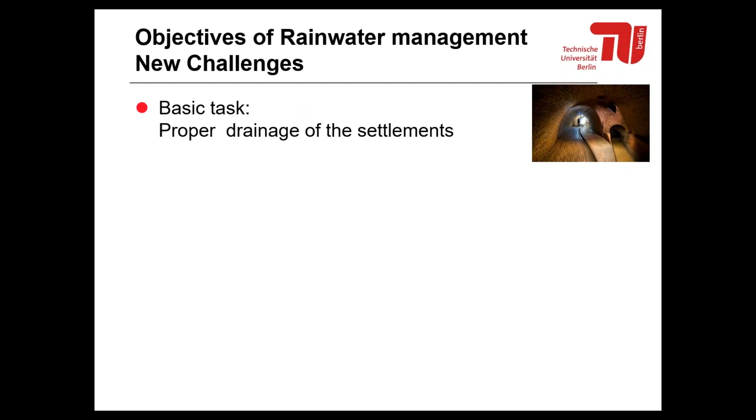The basic tasks for rain or stormwater management and the new challenges are given here. The basic is proper drainage of the settlement, realizing a rain event which appears every 2 years. We have huge experience with that. We have sewers built starting in the middle of the 19th century, out of bricks, as you can see here. But we have new tasks regarding water quality, since pollution on the roads has increased, so we also have to treat the stormwater properly.

Due to climate change, we have additional heavy rainfalls and flash floods. You see here, it's not a traffic jam, it's a heavy rainfall on my way home with my bicycle, by the way, but I couldn't pass these cars.

Also, we have to care for the climate of the city. The heat is much stronger than before, it's increasing. We had an awful April, and also the years 2018 and 19 were very hot. So heat island effects, and also drought, so we need to irrigate our parks and cover the growing cities. The sealing we have already done with asphalt pavements, and also we have a loss of biotopes.

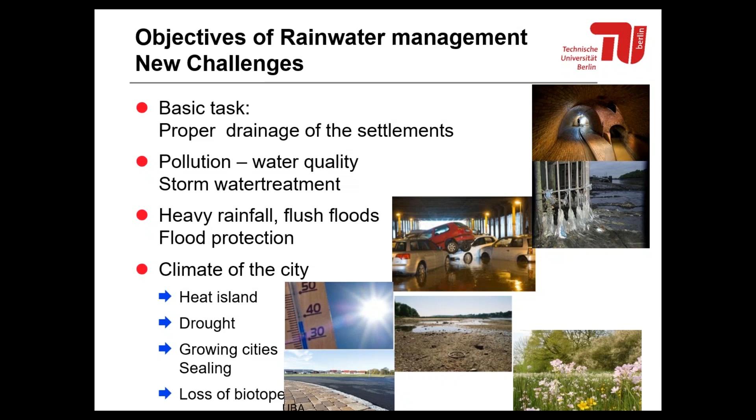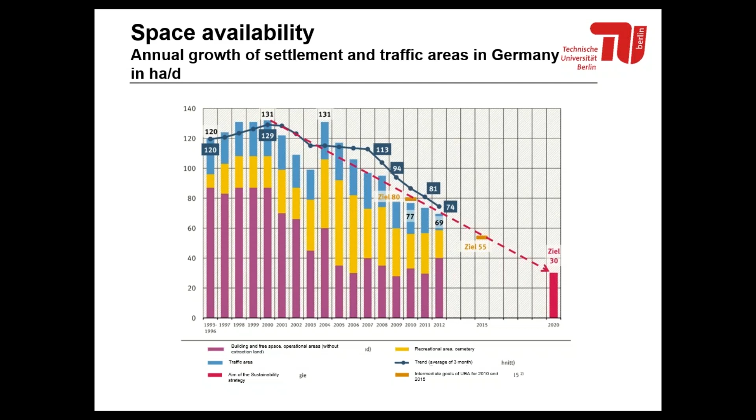The other issue is that people like to gather around, to come close to each other, not just 1.5 meters apart - they like to live in cities. And that's why we cover more and more of the surface. Actually, in Germany we have around 70 hectares of newly covered surface per day. 70 hectares means 15 square meters per second - 15 square meters is just about a student room. So we have to reduce this.

The first part is conventional rainfall management. As I mentioned, we have to prevent flooding of the street. We have the drainage here, the water from the roofs. The conventional system handles maybe a 15-minute rain event which appears every 2 years.

Then we have rare heavy rains, which, as I mentioned, will appear quite more often. So we also need to use the open spaces and the traffic spaces, the roads, for transportation - for transportation of the water, not for traffic. You can see here, you have to calculate the pathways, the flood pathways for the water. And for the biggest event, to protect us from it, we need property protection - I will also explain that, the safety of houses, so there's no flooding of the houses.

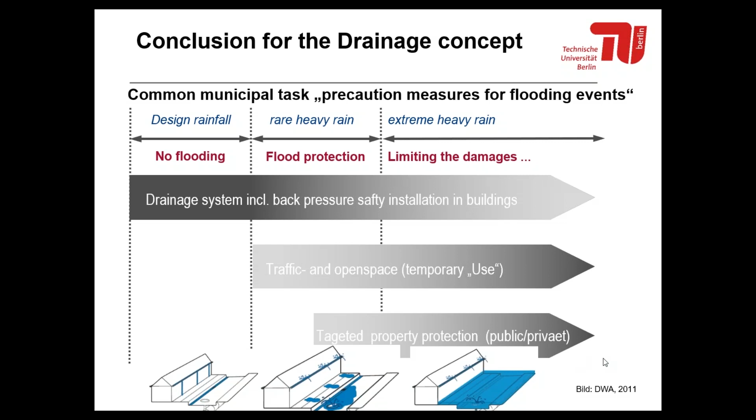Yes, the base for our calculation is the water balance. We have to look and be oriented to the natural water balance. On the left-hand side, there's a small example: maybe 40% transpiration, 10% runoff, and around 50% infiltration into the soil. But if we create a city, we have a heavy impact on the water balance.

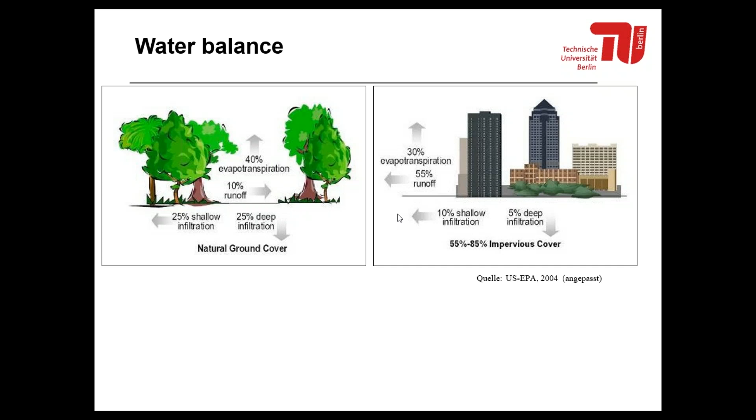So the evaporation is reduced, in this case down to 30%. The runoff, we have to increase by our drainage systems up to 55%, and so the infiltration is much too low. So we have to check this, and in all our plannings we have to keep back and look at the objective that we have to compare the natural water balance of a similar area to our planned real estate or district or site level.

And then we have to adjust the water balance by the options we have, the methods and the measures. We have to implement more evaporation or more infiltration. Our recommendation is that you should not change the single components of the water balance more than 10%. And because evapotranspiration is really difficult to implement - not all architects like green roofs - we can allow maybe 20% here.

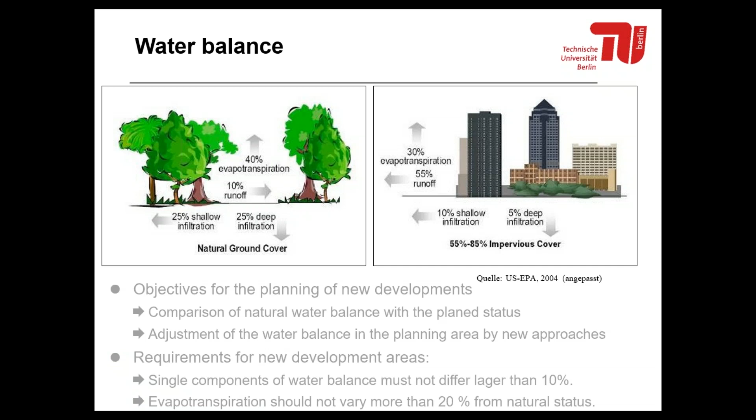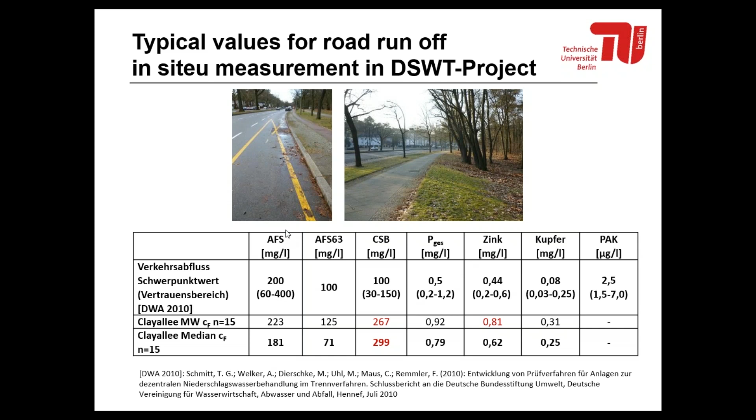So the German concept is to look at the fine suspended solids, which are smaller than 63 micrometers, and then we look at the open space - what is the use for the open space? Maybe just a roof on a single house, then we would not expect much, so then we're maybe lower than 280, and that's tolerable. But if we have higher concentrations of suspended solids on our surface, then we have to implement treatment systems for the rainwater.

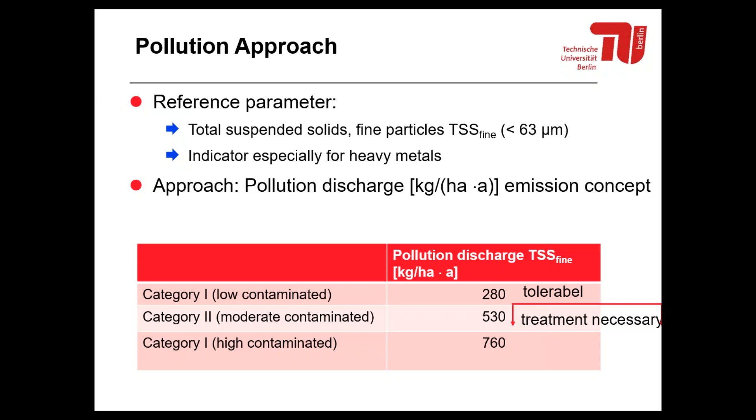So the conventional treatment we know very well - I mentioned already our sewers, so we have combined sewers. One question of mine would be: how many of you have combined sewers? Maybe which fraction in your city? In Berlin, we have around 30% of combined sewer still in operation, but we also have 100 combined sewer overflows.

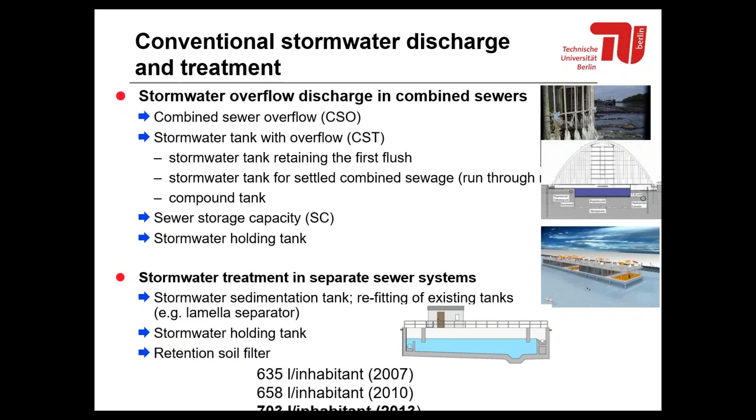We can see here also stormwater holding tanks, and the high end of stormwater treatment. In Germany we installed up to 700 liters per inhabitant of storage volume. That's the average, and it's still increasing - you can see from 635 to 703.

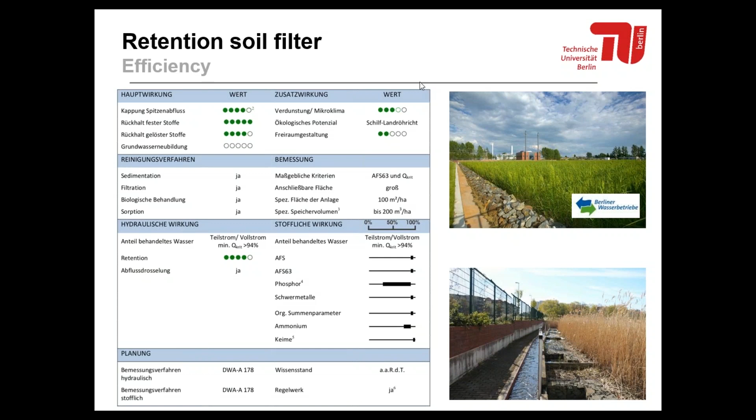So the high end of treatment in a separate system is a retention soil filter. You can handle the peaks of the flow, eliminate all the suspended solids, eliminate phosphorus and also COD. The space demand is just 100 square meters per hectare of area to be dewatered.

I will briefly explain all the systems, I'll try to hurry up. On one hand, we can decouple space which was sealed by pavements or whatever. We can implement other traffic surfaces, porous asphalt for example. We can use rainwater harvesting at the houses, and improve infiltration. This can be done decentral or centralized.

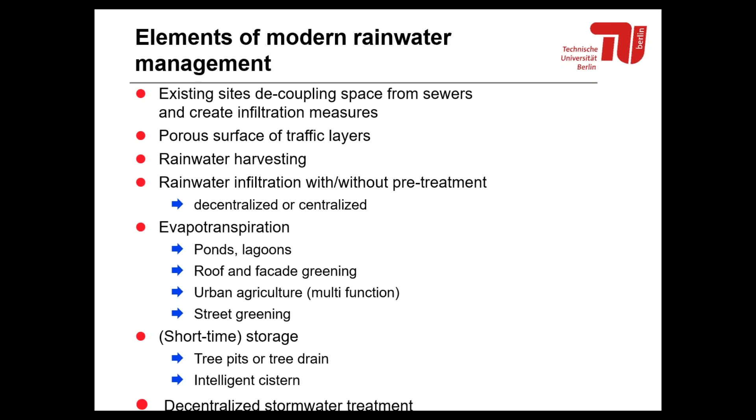Then we can build all these ponds, roofs. Urban agriculture can also contribute a certain value for the water balance. I mentioned street greening - what we developed is tree pits. We go into this, and an intelligent cistern to keep good elimination of microplastic and dust on the roads. We suggest decentralized stormwater treatment, although there's a high maintenance cost affordable for that.

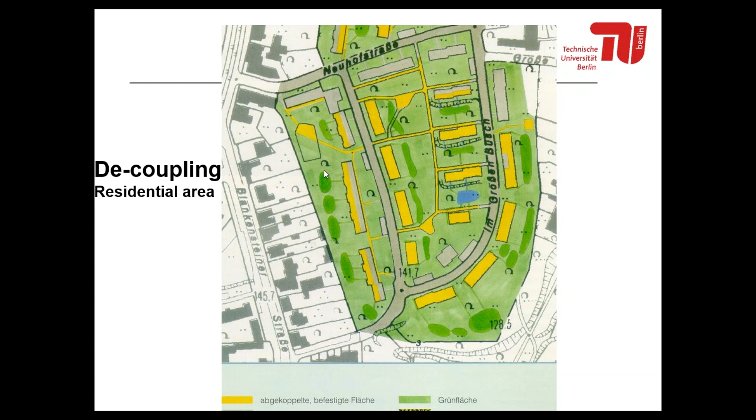Decoupling - this is an example from the city of Essen. You can see these are the houses, and all the yellow parts are decoupled from the drainage. So there's new capacity in the sewer, and they have built swales here, multifunctional swales.

You can see here, this is a dry season, but this is a swale for the water. But you can also dry your laundry and take a sun bath.

Unsealed traffic layers, this is also developed from our friends in the Netherlands. The open porous asphalt is quite efficient for drainage, but all the fine particles will clog these pores, so we have to do more very efficient road cleaning.

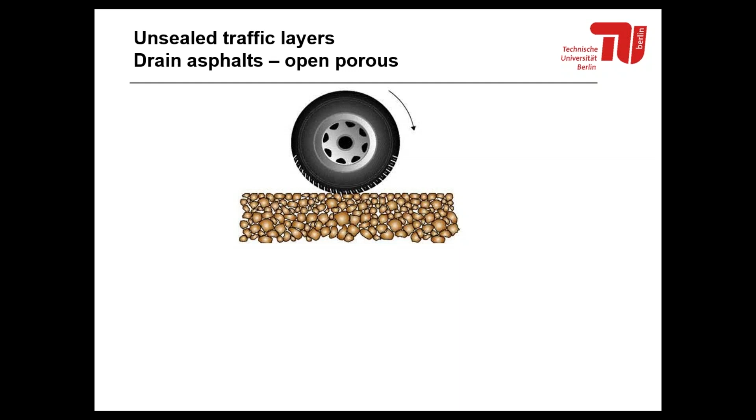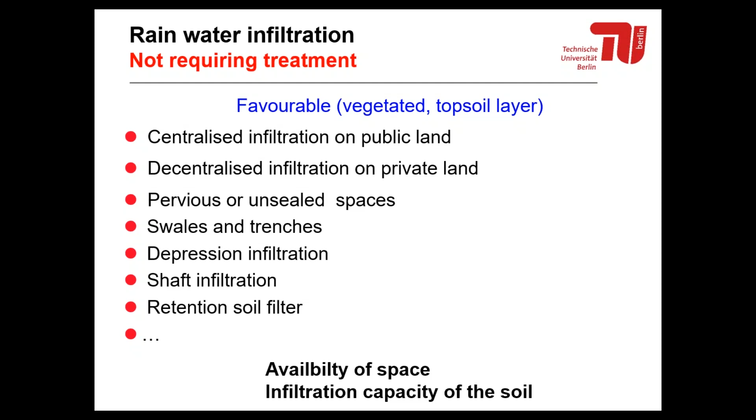There's an overview here given for all the possibilities for infiltration. You can look at this overview later. I will show you the options in detail, but we always need a certain amount of free surface, and the soil has to offer a good infiltration capacity so that we can infiltrate the rainwater.

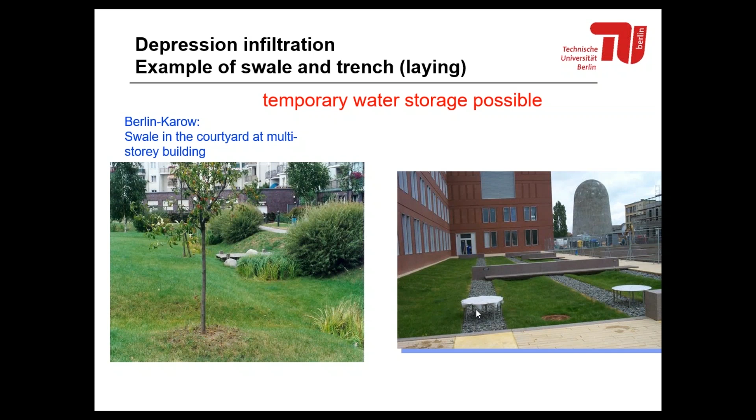If you have less space, here is an option also, two options from Berlin. You can implement a swale, we have seen the swale already - this is for several houses and also for the pavements and sidewalks. Additionally, there are ditches with gravel to increase the infiltration capacity.

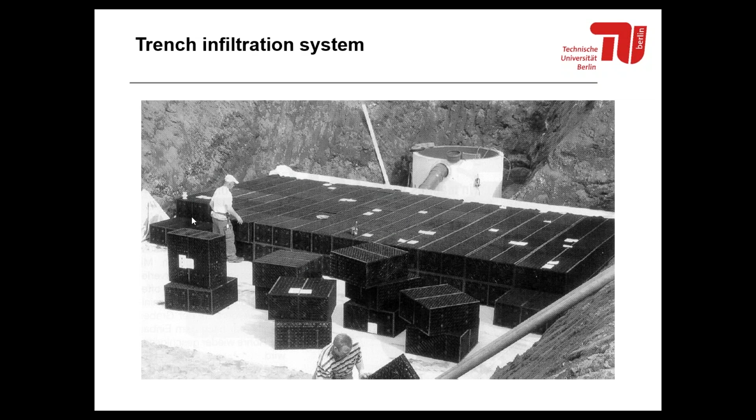If you have less space or less infiltration capacity, you can build subsurface storage, maybe with plastics. It's given here - subsurface storage with plastic, and from here you can filter water out into the ground. So this is trench infiltration.

A variant of this trench infiltration, developed with the consultant Sieker, which we collaborate closely together with, is the deep bed trench. It can be implemented just in the road. The water can be treated there, can be stored, also stored below the ground, and there's a low space demand. Additionally, it calms down the traffic, maybe in residential areas.

Also green roofs. Green roofs improve evaporation, but they also buffer the peak of the effluent from a roof, and it's additional habitat for organisms. We also have a contribution to the microclimate on the roof, a better thermal isolation, but we have to keep in mind the weight of the additional green roof, so maybe it's not easy to implement directly. We can differentiate between intensive green roofs with trees and so on, very nice, or extensive green roofs.

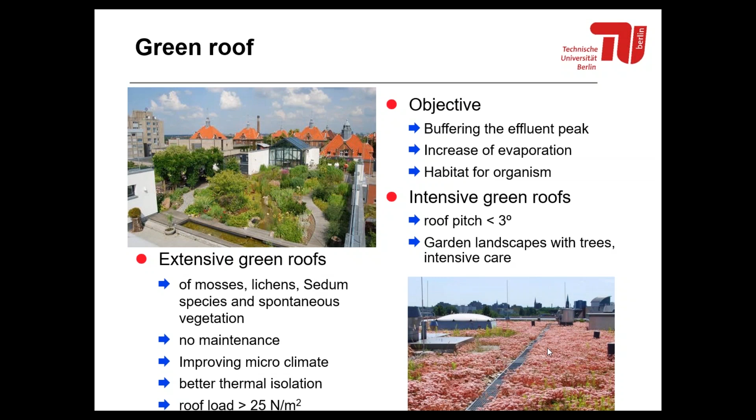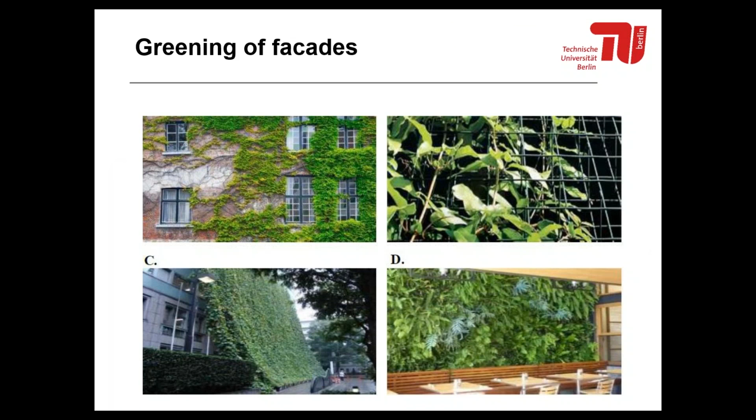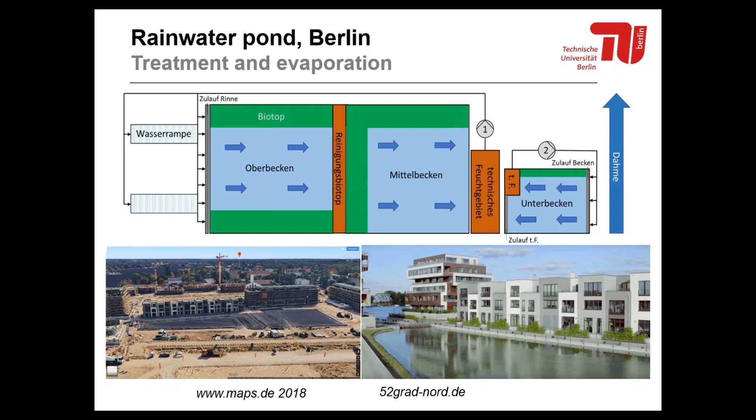The newest thing we also developed with Sieker is the intelligent cistern. A conventional system is quite often used worldwide - in Germany we have just 1.5 million, each year 80,000 new ones. It's just a contribution to saving drinking water, saving money. But additionally, it offers new space in the sewer system when we don't have this rainwater in the sewer system.

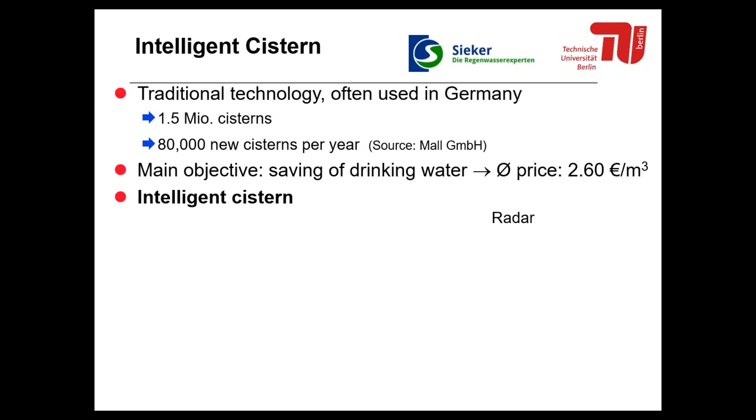So the idea of the intelligent cistern is to predict the rainfall. Here you can see the weather forecast, and we empty the system just by the information from the radar, from the rainfall prediction, and then we have the capacity to store water directly at our house.

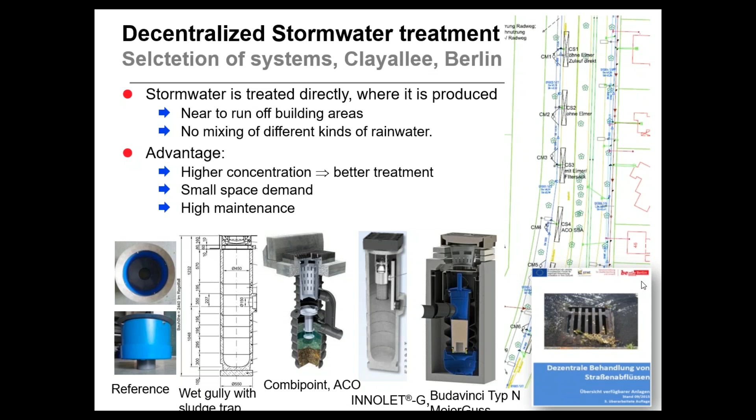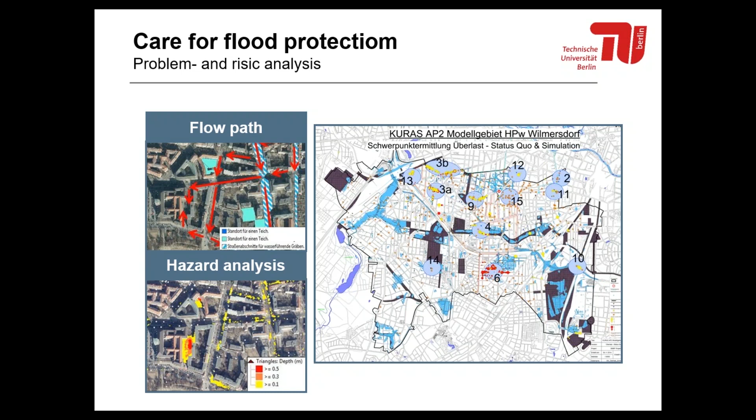At least I also want to care for flood protection. Flood protection is needed, so we need to calculate the flow paths at the surface. We need to detect depressions where we can store water, and we need to make a hazard analysis of where important buildings or points are where a lot of damage can appear. Then you can make a map and a strategy for that.

The first idea, for example, is using a children's playground during a heavy rain event. We have this space, and I guess children wouldn't play outside during the rain event, so we can drain the water to this place. You also have to think about draining the water afterwards, because after the rain, maybe the children want to go out, like they want to go out after Corona.

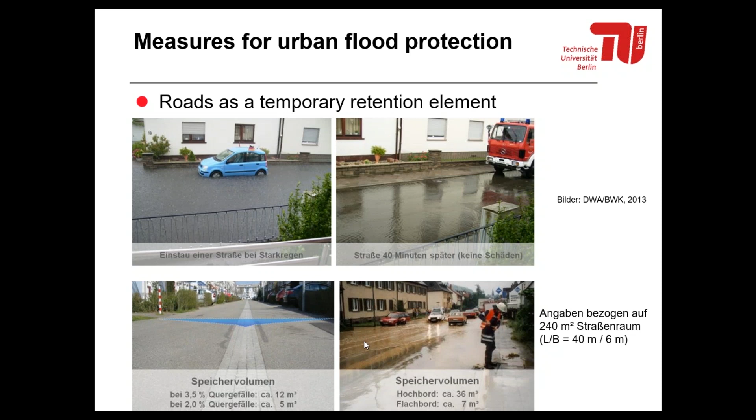Also using the space on the road - if you have a special grade here, you can realize a certain retention volume on your road. You can see here this is during a rain event, and just after the rain, nothing happens to the road.

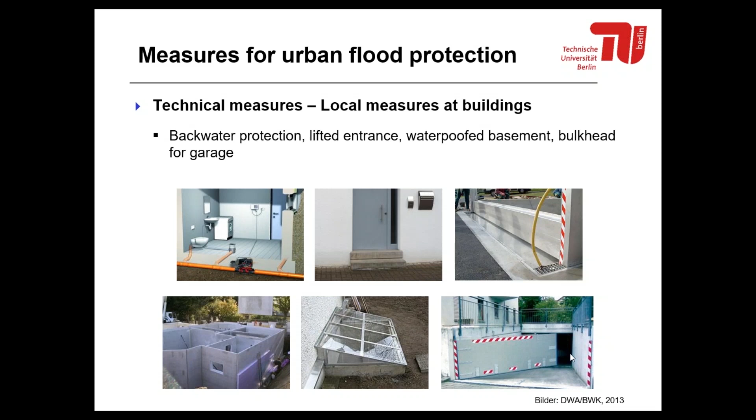Coming to the end, challenges for the implementation of a water-sensitive city—this is also one part of my questions maybe at the end. I think first the stakeholders have to get the knowledge of all the elements and the need. I'm sure the consultants and planners have the ability to calculate with 2D, 3D models and so on. So the region planning was only focused on the drainage, but we need to build up the competences in the different authorities. I'm convinced of that.

In the cities we need strict coordination with all the planning departments, like traffic planning, spatial planning, city planning, and of course water planning, drainage planning. We also need regulations—if the state does not make them, we can make regulations for our own city or settlement, rules for flood protection and creating open spaces. In Germany we have a rainwater fee, for example: you pay for each sealed surface, maybe €1.90 per square meter, and if you decouple it, you can use this money for the decoupling or whatever. We also have to think about integrated planning, decreasing concentration of housing, and looking at open spaces for flood protection and infiltration.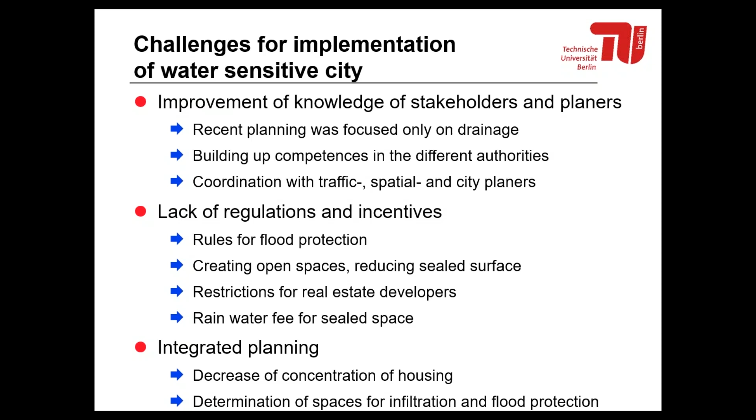In the end, I want to show you the vision we had some years ago together with Imperial College London, which is often mentioned in the Corona crisis now. We had a project, the Blue-Green Dream, and now a project called the Blue-Green Street. My vision is also to make the Blue-Green City—a water-sensitive city. That's the focus we have to work on.

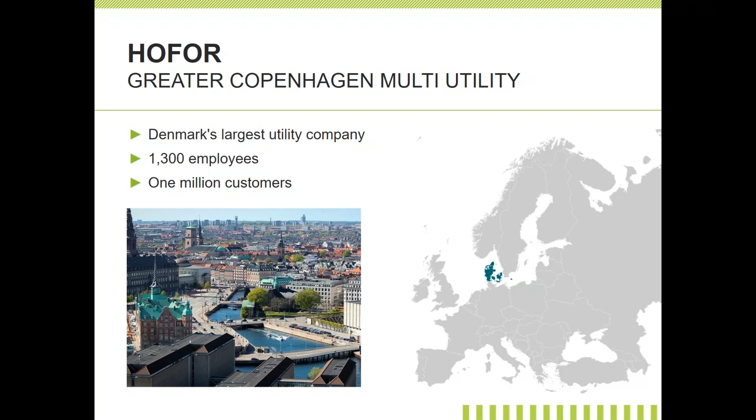Copenhagen prepared its first sewer plan in 1976, and it was renewed every 4 years since then. This led to a lot of construction of retention tanks. We have a combined sewer system, and Copenhagen municipality is almost 100% combined sewer. The surrounding municipalities, which are also part of HOFOR, have much more separate systems, but Copenhagen itself has combined systems. So retention tanks were necessary at that time, and that led to closing many of the overflows into the harbor. Further, 3 advanced wastewater treatment plants were constructed.

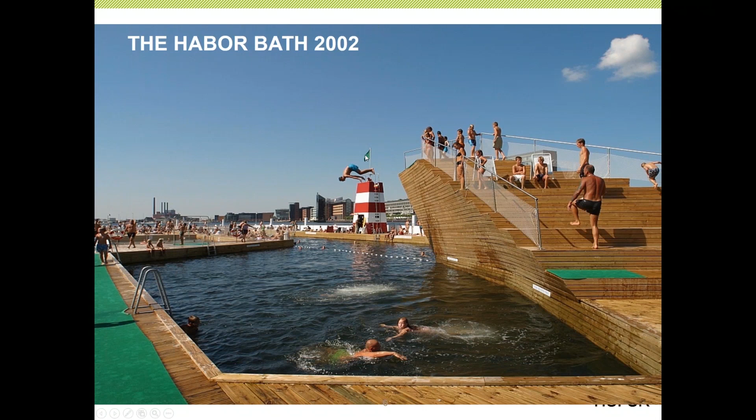2nd July 2011 was a real game changer. We had this extreme flood event, causing a lot of damage all over the city, a combined damage of above 1 billion euro. Since there were so many people affected by this flooding, there was very broad political support that something needs to be done, also at national level.

A cloudburst management plan was then prepared for Copenhagen, subdividing the city into 7 hydraulic catchments, and at the same time describing these catchments for their urban features, because it was agreed that a lot of the rainwater will have to be handled on the surface and not in pipes.

At the same time, the government prepared a new regulation stating that all handling of rainwater should be financed by the water company, so that this is financed on the water bill. So we have a budget now of 1.4 billion euro and 20 years to implement this. So financing is not being discussed, because the money is there and it's put on the water bill.

The second important thing was the level of capacity in this extreme rain handling system. What size of rain should we design for? There will always be a bigger rain coming. We made a business case comparing the investment to the potential loss, and based on that comparison, we agreed that we should end up on a design level of 100-year rain in 100 years' time. There's a climate factor to that. So statistically, 100-year rain in 100 years' time.

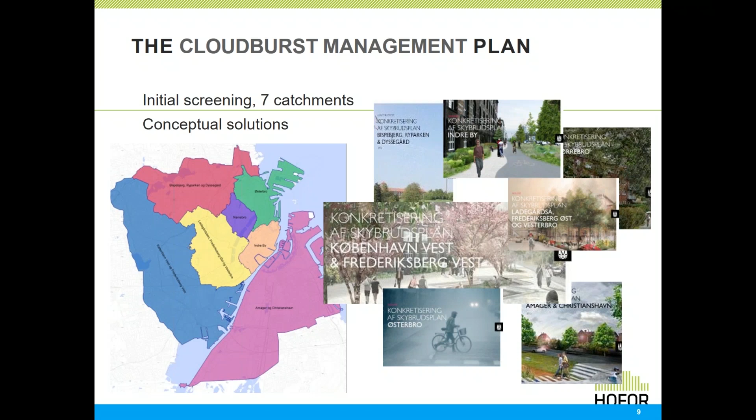It's important that your solution is hydraulically coherent. You can put up a fancy feature on a square and make storage there, or you can make some green roads, but what role do they play in controlling the flooding? You have to prepare a coherent plan, and here it is for a subcatchment. The plan consists of streets transporting water, of retention places, of green streets with green plants and features, which we've just seen in the previous presentations. All this drains down to a major pipe system or tunnel system, taking the water into the sea. The comprehensive plan is key to making sure that every intervention you make plays a role in the overall picture in achieving a service level for the whole city.

When you are working on the surface, you have to work closely with the municipality because they have urban renewal plans, either for a whole area. This includes some low-income areas which need uplifting. There is a churchyard where one-third is going to become a public park, and so on. This is the churchyard, the development plan for it.

There are streets that have to be upgraded. There are inner yards where you could keep water back, and a program for doing this. And of course, parks that you can rebuild, making them more fantastic landscape-wise, while at the same time retaining water.

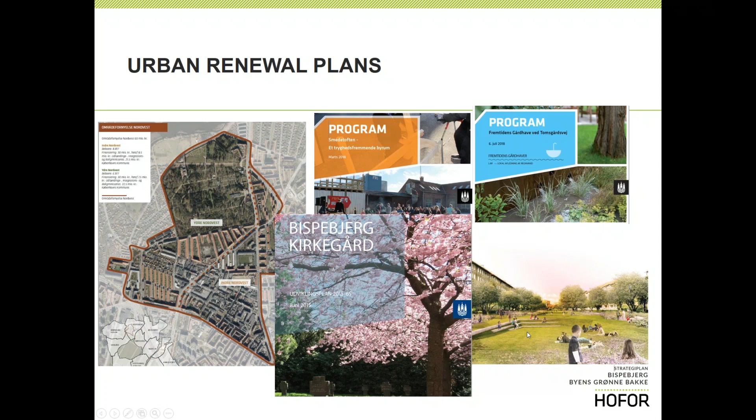So all in all, cooperation between the water company and the municipality means that you divide the work between you. We can manage all the hydraulics. We can also do a lot of the design, and oversee the construction. The municipality issues discharge permits and develops urban space with landscape architects. Some of the areas are conservation areas with old buildings and old trees that need to be protected. And of course, there's the whole street upgrading, street renovation, etc.

In between HOFOR and the municipality, by the way, HOFOR is 100% owned by the municipality.

So it's a municipal-owned independent company. In between, there are all the private roads and private streets and the building associations. They were also flooded on 2nd July 2011, so they are ready to participate also.

By the way, a lot of the hydraulics, HOFOR are financing, because it's cheaper to invest in them retaining water compared to building larger pipes or tunnels. That's all the time the argument: we can spend money on these green solutions as long as it is saving us investment in pipes and tunnels.

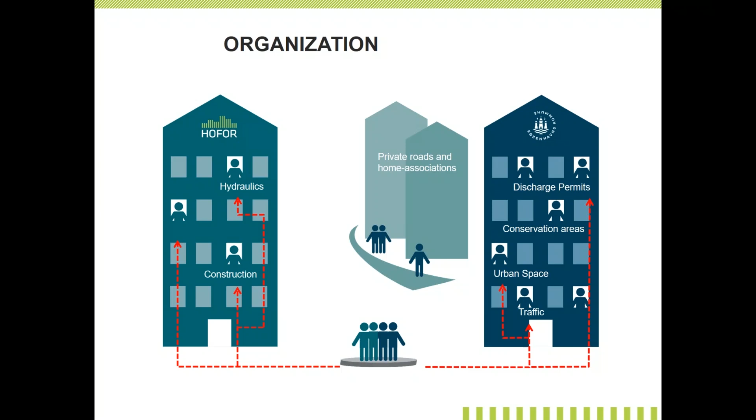And we even have challenge during daily rain. Daily rain is less than a 10-year rain in Denmark. The combined sewer should be able to accommodate a 10-year rain. So you can see our combined sewer doesn't have enough capacity, and therefore we have to start disconnecting rain from the sewer.

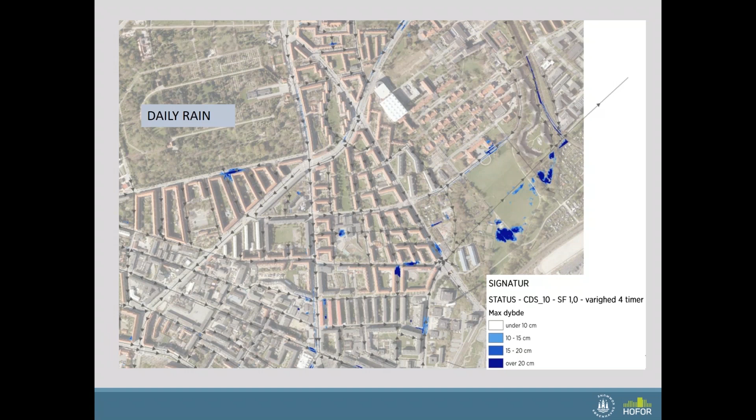There are green features around the trees that we've just heard about. This has been built now and are functioning very well along this street. And then you have all these green streets with the green features holding back water and disconnecting and treating rainwater. All this water, the surplus water that cannot be held back in green solutions, is being drained down to a major tunnel system here, which is running through the western part of the city.

And taking the surplus water into the sea. You cannot make a full flood protection with green solutions only - it's going to be a combination.

But now we have put in these line drains, a new tunnel system, and take it out through the seawall with a non-return valve. And by the way, we have the parliament here, and they can see we are doing something, and they rushed out to solve the financing problem, which was very good.

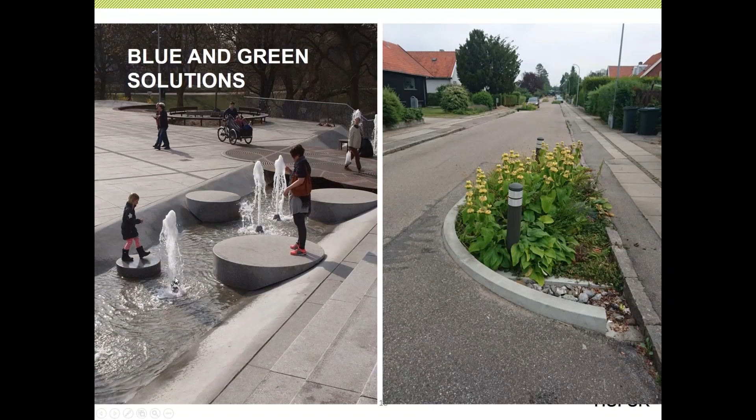We can also use our parks to let the water go in there. We must just remember, when you have a combined system, floodwater will always include a certain percentage of wastewater. It could be 1% only, but there is wastewater, and besides what comes from excreta from animals.

So when this water has evaporated, infiltrated, or just - we are at the moment calculating or estimating the risk from children playing in this park immediately after. The pathogens, the virus, the bacteria, the protozoa, etc., they will die off because they're in a hostile environment and they don't like the UV from the sun, but they will take time to die off.

And if children go and play there, a 1-year-old, and throw the dummy and put it back into the mouth, there is a risk of infection. We are calculating this and finding out if we have to limit off the park for 1 week after a flood event like this.

Urban heat—we are also breaking up the asphalt, putting in some green features. HOFOR will pay for excavating and arranging space for water, and the municipality will invest in putting in plants, a bench, etc. Here you can sit and enjoy this nice green area where there was asphalt before.

Just remember, coming back to health, this water should not stay here for more than 5-6 days, or you will start getting mosquito breeding. It will not cause disease in Denmark at the moment, but as the climate gets warmer, we could eventually start getting mosquito-borne diseases. So we have to include in our design a way to drain off stagnant water.

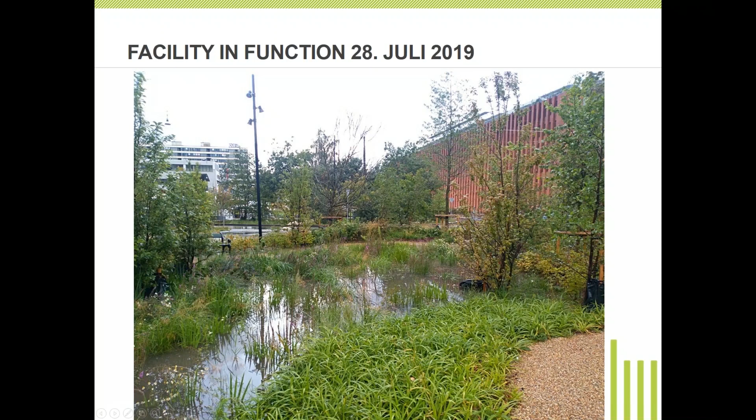Here's a final example from the central city, St. Anne Square. A lot of flooding—it's close to the harbor, and water cannot get out into the sea. We have lowered the central park and put in a pipe system where we can retain water and use it for watering the park during dry periods. And if it's raining, we are emptying all these cisterns, all these pipes, and they can be used for transporting the rainwater.

Finally, I would like to invite you to come to Copenhagen. It was supposed to be the World Water Congress in October, and the whole world was supposed to come to Copenhagen. We don't think it's possible, so it's being postponed to May next year. A lot of the Baltic countries are involved in this, so I think it's a good place to meet and share your knowledge. Thank you.

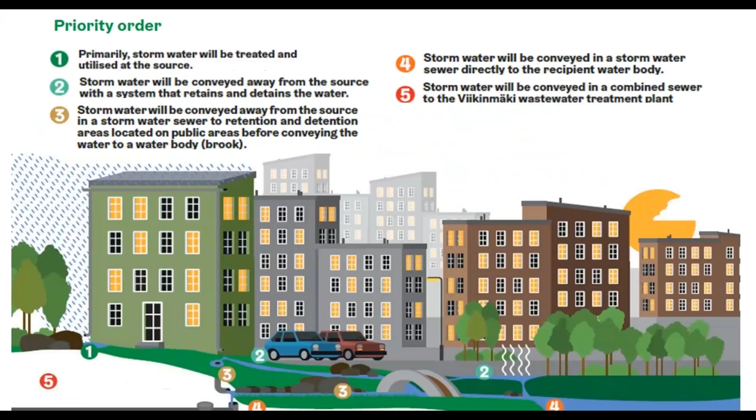There were also aims for regional and local drainage, with consideration of climate change and densifying city structures, but also aims for stormwater quality improvements, and more administrative things, like ensuring cooperation and procedure models are in place, and that we take care of competence and resources within the city for proper stormwater management.

In addition to these high-level aims, we included a more practical priority order in the stormwater program, to open it up more for the actual practical planning level.

So the planner for new areas should always start with the first bullet point: try to treat the stormwater at the source. If that is not possible, maybe due to rocky ground that we have a lot of in Helsinki, then the stormwater should be conveyed away in a system that retains and detains the water.

If that is also not possible, stormwater should be conveyed to a location where it can be detained and retained, maybe on public areas, before it's discharged into a brook or the sea. Bullet points 4 and 5 are more or less pipe solutions and should be avoided, but in practice they are still used in this situation.

The last point from this program—I don't have time to go through the actual practical measures, but we included 38 of those, and now you can see the topic of content. If you're interested in the actual measures and also how this is monitored and reported, you can look them up in the program.

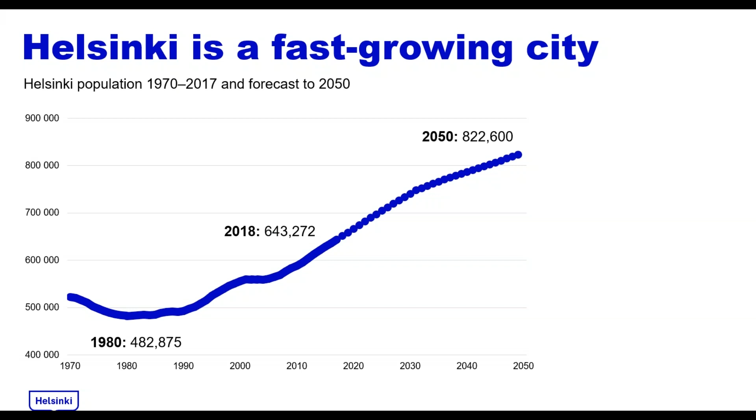One background slide here: Helsinki is a really fast-growing city. In the coming 30 years, the inhabitants will increase by 200,000 persons, and this will, of course, challenge urban stormwater management. It will lead to new development areas being constructed, but it will also lead to densifying the already existing city structure. This really calls for sustainable stormwater management, and we try to plan these new areas in a sustainable way.

For those of you not familiar with the green area factor, it's a tool to ensure sufficient green infrastructure when building new blocks in a dense urban environment. We have been using this for residential, really densely built residential areas in Helsinki.

The green area factor, in its simplest way, is actually the scored green area—that means the area where you have included green infrastructure—divided by the total lot area. Then you get the efficiency of the green infrastructure in the area.

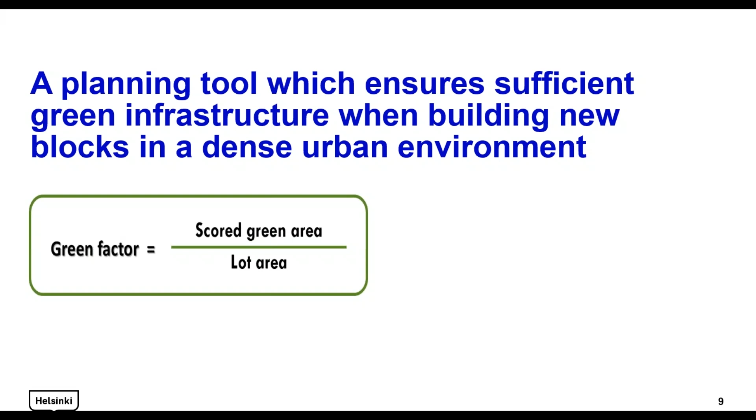Here is a picture of how the green area factor Excel tool looks like. It consists of 5 different sheets. 2 of those are more descriptive: the instructions and the descriptions of elements, which kind of green elements you can use.

Then you have the 3 sheets which are the actual calculation sheets, consisting of limitations, the green elements you will add, and then the results. On the limitation page, you add background information for your lot, the areas for buildings, and the land use. In Helsinki, we chose that the target level for your green area factor will be defined by the land use that you choose.

Then you move to the green elements sheet, and there you start adding your green elements. These can be green roofs or rain gardens—there are actually 38 different elements that you can choose in this tool.

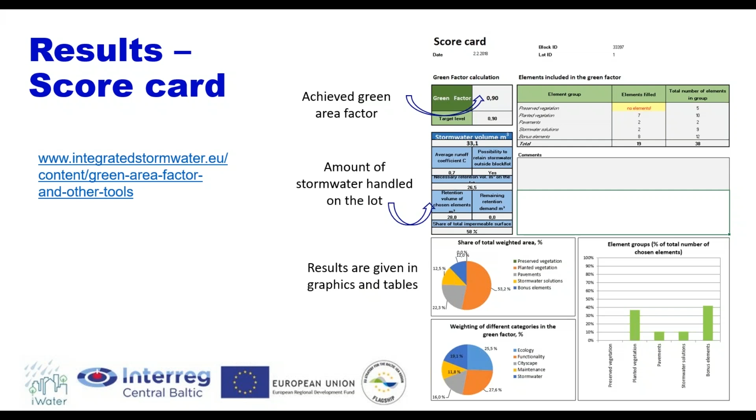Finally you come to the result sheet, where you can compare your achieved green area factor with the target level and see if you achieved it. There is also information about the amount of stormwater handled on the lot compared to what you planned with the elements you added, and various graphics showing what kind of green elements you included.

Then the last slide, I think, on the green area factor, I will try to show how it's used in planning in Helsinki. First of all, the green area factor is added as a requirement in zoning regulations in the city plan, in order to force the developer to use this green area factor.

Another possibility, in addition to the zoning regulations in the city plan, is adding the green area factor to lot assignments and land use agreements, so that the constructor or developer knows that he needs to use the green area factor when taking the land into use.

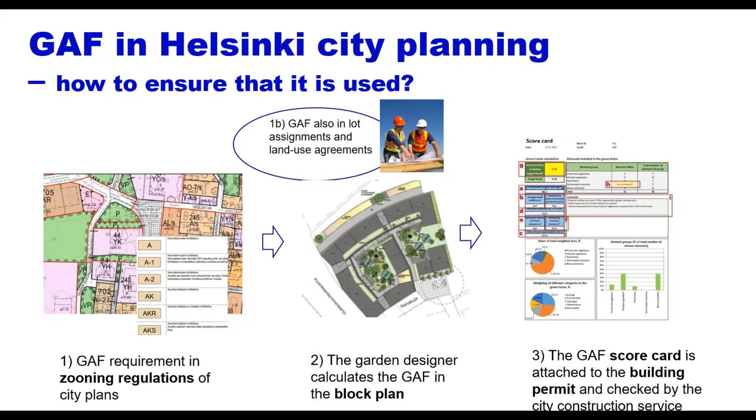After that, the developer will hire a garden designer who will calculate the green area factor for the block or lot. The green area factor scorecard is attached to the building permit, and construction supervision from the municipality checks the scorecard to ensure the target level is achieved. This is a way to force the green area factor into the planning process.

Then we move to the third set of practices, which concern sustainable urban drainage solutions. There are a lot of different techniques, but here I chose to focus more on the quality issues.

At the moment, about 25 kilometers in 10 years is the speed it's advancing at, and there's somewhat 200 kilometers remaining. So we need to do something in between before everything is separated, in order to prevent flooding.

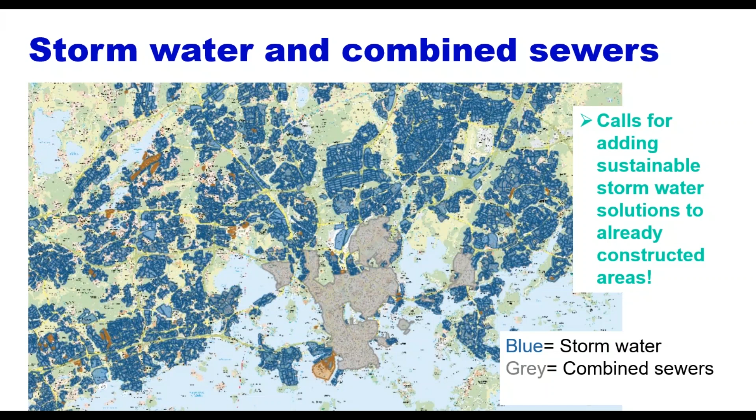Also, on the stormwater piping areas, due to the densifying city structure, it's important to include green infrastructure to prevent flooding there. This really calls for adding green infrastructure in the city area.

But as I mentioned, I chose to focus on solutions that also improve stormwater quality. On the map here, there is a brook marked, the Haaganpuro Brook in Helsinki, and these two solutions use biofiltration technique to clean the stormwater before it's discharged to the brook. We'll start with the first one.

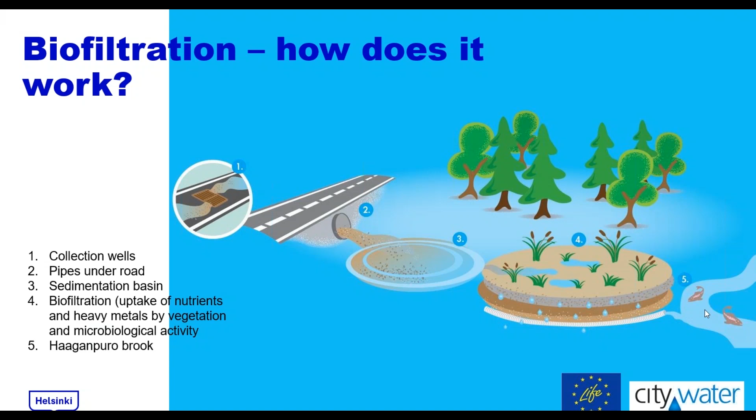So I've already talked a bit about how it works. The stormwater is collected from heavily trafficked areas in collection wells, then led under the road to a sedimentation basin, and after that to the biofiltration area, where vegetation and biological activity take care of nutrients and heavy metals as it biofiltrates through. Some water is also infiltrated into the ground, but most is drained to the brook, cleaned before discharge there.

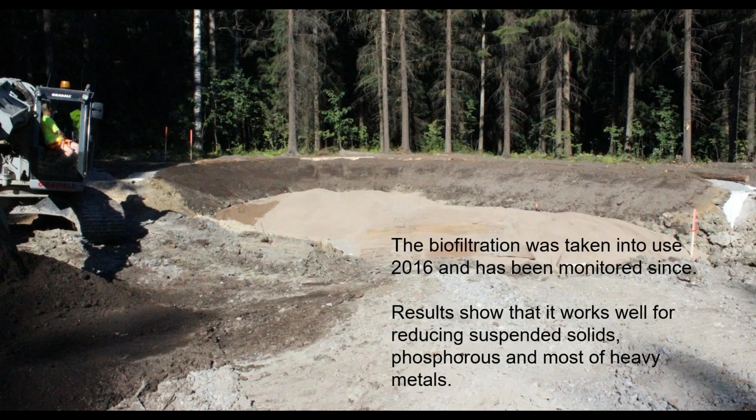I included one picture from the construction phase, so you can see the main biofiltration material, the filtration media, is sand. We've been monitoring it for a few years now, and it shows quite good results for suspended solids, phosphorus, and heavy metals.

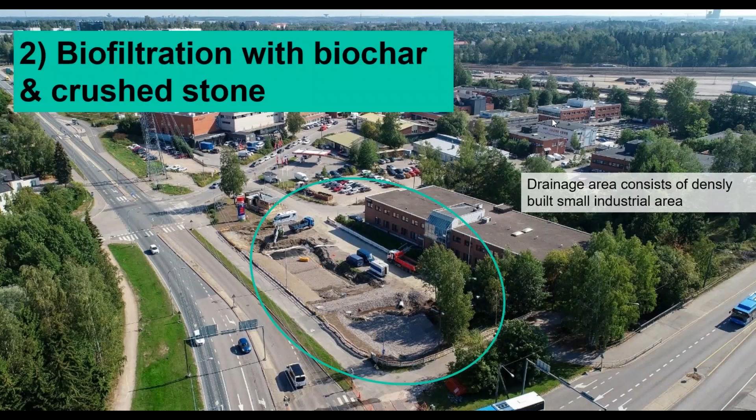And then one more solution, from the same area, also aiming to protect the brook. Here we used biochar and crushed stone as filtration media. You can see the actual solution being built here in the circle. The drainage area consists of a densely built small industrial area, which was the reason we chose this site for the solution.

There have been some smaller occasions, but also quite big occasions, of oil leakage from that industrial area. The aim here was to test if biochar can be used not only for quantity management, but for quality management of stormwater.

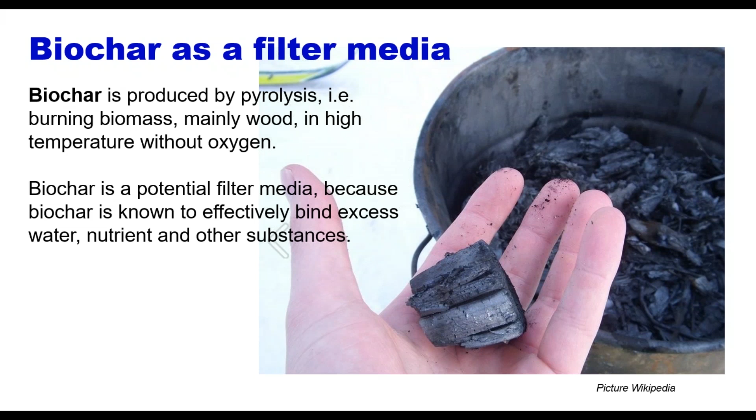For those not familiar with biochar, it usually contains organic material from wood, which is produced by pyrolysis. It's a potential filter media because biochar is known to effectively bind excess water and also other substances.

I'd like to end with some final reflections, not only based on these practices but on what I've experienced here working in Helsinki with stormwater issues. I think multiple development levels are really important—you need to advance and push the work on different levels, both strategic and policy level, but also the day-to-day work, and by piloting.

Even if it sometimes feels like how much use is one pilot somewhere, the process of pushing through a pilot's investments is also a learning process for everyone involved, and they can reproduce that process elsewhere.

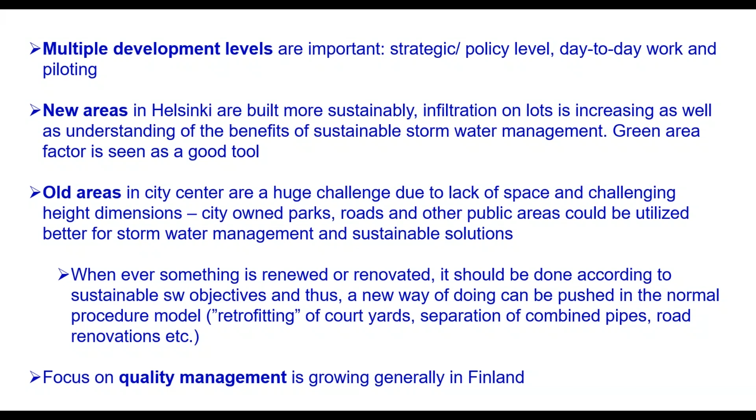Thank you very much, Kajsa. It was really interesting to listen to your solutions, and also on the strategic level that you have a stormwater management strategy, organized with monitoring and follow-up. And what you've shown in your solution makes it not only about stormwater but also biodiversity—interesting in the middle of the city. Thank you very much, Kajsa. I just remind our audience that all questions to Kajsa can be typed in our question box.

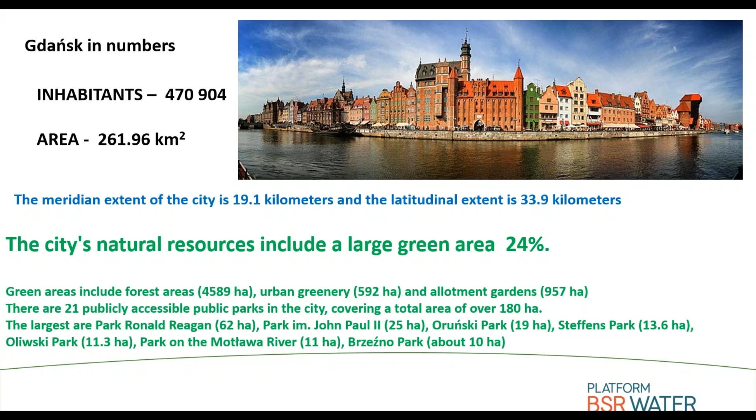We have natural resources with about 24% green areas, which of course generates pros and cons. I will tell you later about these pros and cons which could appear in our city.

In connection to what Matthias said in the previous presentation, according to a scheme of development, we can say that Gdańsk city is somewhere between water cycle cities and water sensitive cities, still far away from the urban blue-green dream invented by Professor Čedo Maksimović.

Gdańsk started to develop its sewer system. We have a fully separate sewer system, and I think this makes us a very good example from this point of view. The sewer system was established at the end of the 19th century, and since that time, separate sewer networks have been designed and developed in the city.

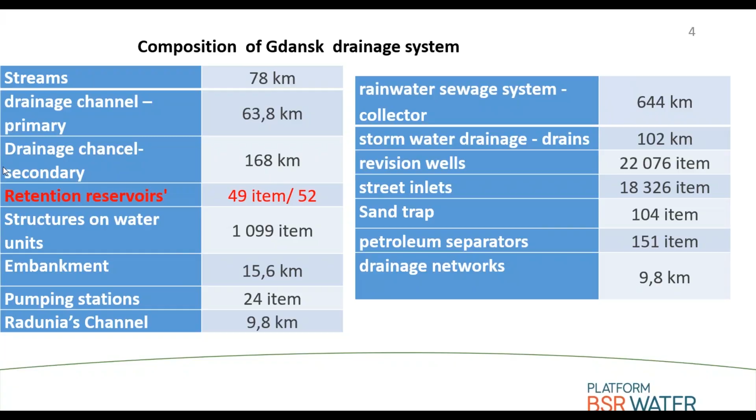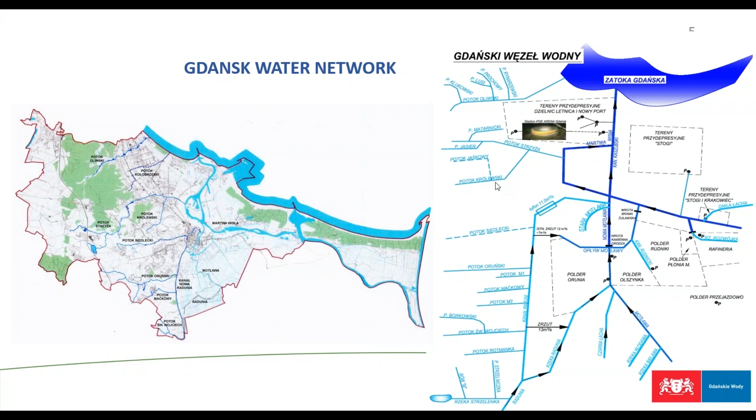Looking at the network of streams, you can observe here with my mouse, I hope it's visible, that our system is very complicated. We have a lot of streams coming from the upper terrace which end up finally in Gdansk Bay. Here you can see how complicated the management of the system is, and all the streams with this separate sewer system and stormwater system are the recipient of stormwater discharge.

We have a dense network of erosion valleys of various sizes, and these erosion valleys could also very easily become, during a storm event, a kind of waterfall which ends up finally in our streets.

We also have an impact from the sea. Depending on the state of the sea, we could have a very big problem. And we have numerous mountain streams which, during the development of the city, meet different barriers like roads and railways, and this causes a big issue to our city.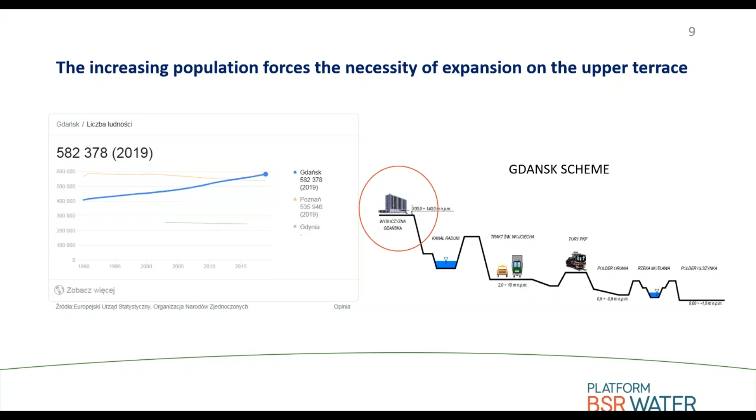Here you can see the cross section of our altitude. Since 15 years, we developed a lot of residential areas on the upper terrace with a lot of concrete and unpermeable pavements, and this creates a risk of potential flooding in the lower terrace.

As you can see here, we have a lot of events like this, due to heavy storms and also some breaking of embankments due to really high water levels in our streams and rivers.

Our stormwater system against flood safety is retention reservoirs, located on the streams, as you can see here in different altitudes, at least 3 levels: upper terrace, medium, and the plateau. This is most likely the most extensive open network of storage reservoirs in Poland.

Now we have 51, and a 52nd is under construction. You can see the huge volume of the retention system. We can estimate, and you can also see here, how it's growing, the retention volume over the years, because we still develop new ones since the city is really happy to have these retention ponds.

They are a good and proven solution in the case of Gdańsk. That's why I give them 5 stars, because they really work well if they are operated and maintained properly. Some additional information: we have 3 types of reservoirs. They are called wet reservoirs.

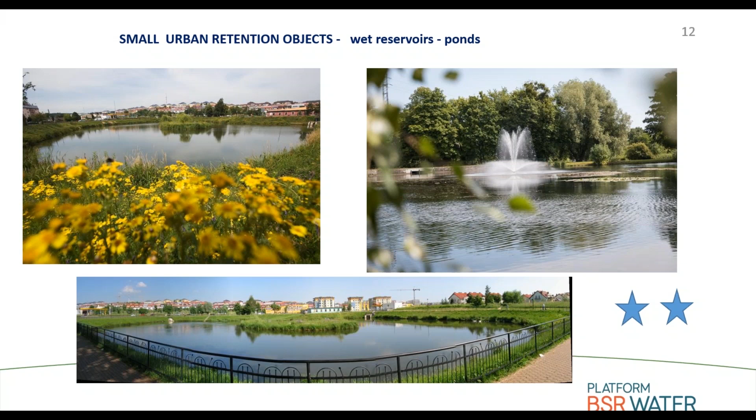But they are proven with some retention volume, though also not so high as the second type, which we can name semi-wet or semi-dry reservoir, where you still have a volume of wet area and volume of dry area, which could be used for retention during storm events.

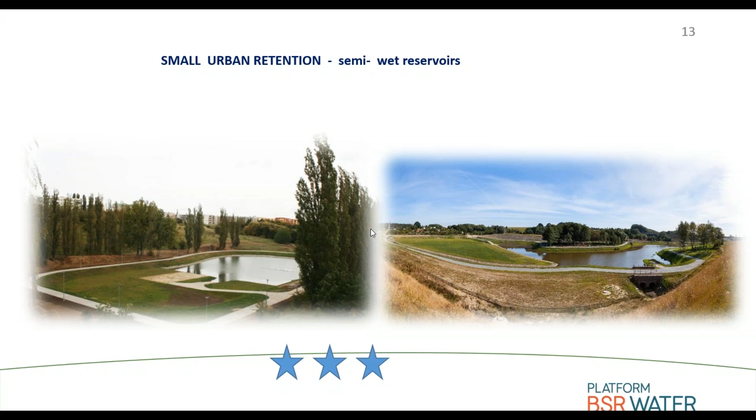I remind you that all the reservoirs in the city of Gdańsk are recipients only of stormwater. So of course we have a lot of issues with water quality, but it's not so dangerous as in the case of a combined sewer network. So you can see a different approach to this retention pond.

Also, it's important because we usually have situations with a heavy storm and very windy weather, with wind from the north, which causes the issue that the stream is not able to discharge into Gdańsk Bay. That's why it's important to keep both the storm events and the stream in the city.

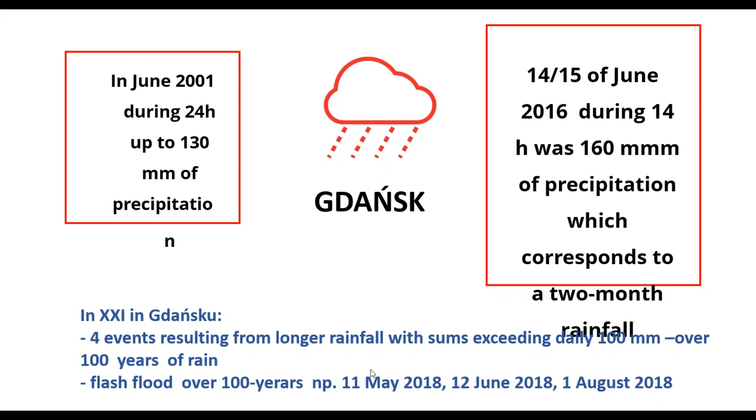And also we see that we have a problem with so-called flash floods, and as you can see here, we have had 3 such events in the last 2 years, which were noticed and registered.

We also face something which is really dangerous for parts of cities, called a microburst, and thanks to this system we can monitor these microbursts.

As you can see here, this is part of the old town of Gdańsk, where the precipitation within less than 30 minutes was 30 millimeters, while in other districts there was actually no rain, like 5 millimeters. So some people say, wow, that was such a heavy rain event, and some people say, no, there was no rain at all.

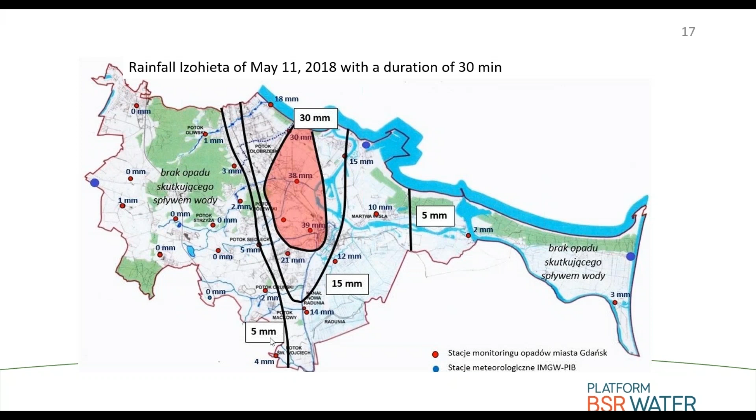So in this case, our retention pond actually doesn't work. Climate change has caused the previous approach, the previous strategy, to no longer work.

The previous strategy was that we collect stormwater and discharge it via a stormwater system into a reservoir or directly into the sea. Actually, this doesn't work anymore, so there's a necessity to revise the stormwater drainage system: to stop and delay the flow, use rainwater for green infrastructure watering, and of course treat the rainwater to keep good water quality in Gdańsk Bay.

The current approach taken by the company is that we need to apply infiltration facilities, green areas, everything mentioned before, as devices before the pipe. It means we start using different facilities to keep the water, to retain it, and to evapotranspirate the water before we discharge it to the network.

The company Gdańskie Wody, as you can see here with the logo, worked out a system based on a hand with 5 fingers—all fingers need to work together. As you can see, we have reservoir retention, field retention, and household retention, which was already mentioned, like green roofs and rain gardens. Rain gardens could be applied at single-family houses or as street retention, and so on.

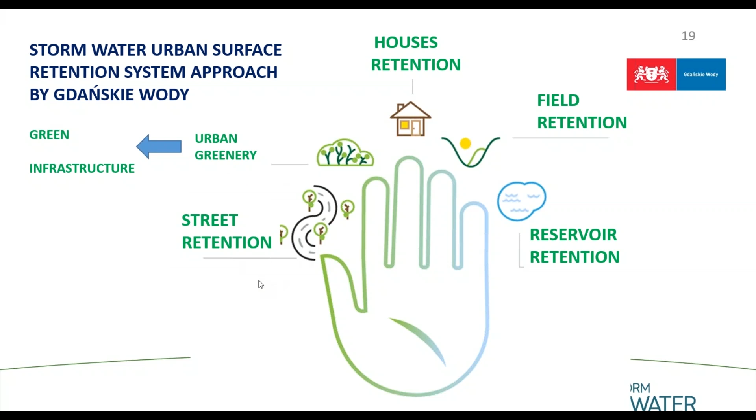I will show you some examples where actually we have the capacity in the city, but we need to modernize the system a bit, and we need to develop the street retention system, which was of course mentioned before in the previous presentation.

Our company Gdańskie Wody has an approach of leading by example, and in 2017 they built the first rain garden in the city. It was built by the buildings where they keep the equipment and facilities needed to maintain the system. As you can see, they collect the stormwater here, and then it's evapotranspirated or kept.

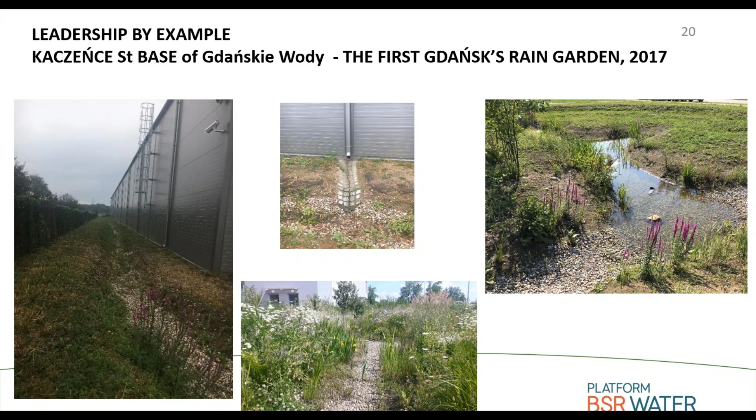Actually, it has only worked for 3 years - this is the oldest rain garden in the city. We don't have very big experience yet, because for example this spring, we are waiting for rain - there hasn't been rain for 6 weeks, so we don't have any possibility to measure how the system actually works.

It's also very important to create this green area, as you can see here, for the retention system. It's enough to build some basin with green to keep the system. Here you can observe a very beautiful rain garden near the bus stop.

Very important in all of this is to involve inhabitants. The municipal company has the idea of creating public rain gardens, sometimes bigger or in 2-3 stages, since they're also used to clean water, keep water, and treat stormwater before it's discharged. Then they ask children from kindergarten or school to help with planting, and the children are very happy, and parents are very proud.

I used to go with my students to such rain gardens, and people ask us and tell us that they are very proud of the system, and they are aware of what it's for. I think this is very important, that people should be aware what it's for.

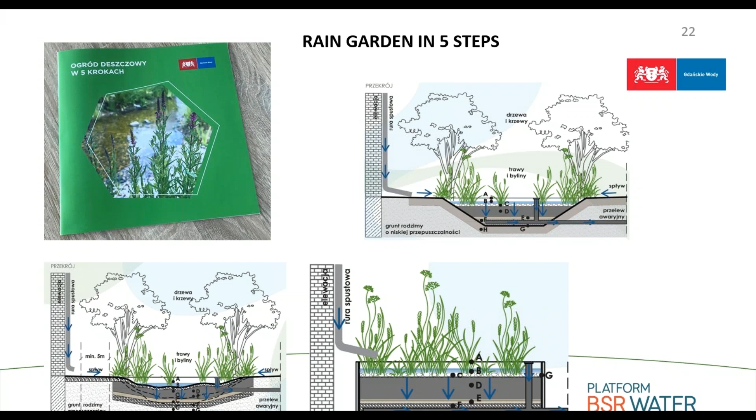Also, Gdańskie Wody issued a handbook on how to create a rain garden in 5 steps. You can select between different solutions appropriate for your place, for your house. There's also a movie you can easily download to see how to create your own rain garden. Of course, there is some money from the city of Gdańsk to support you if you would like to build your own rain garden at your house - you can apply for extra money to do this.

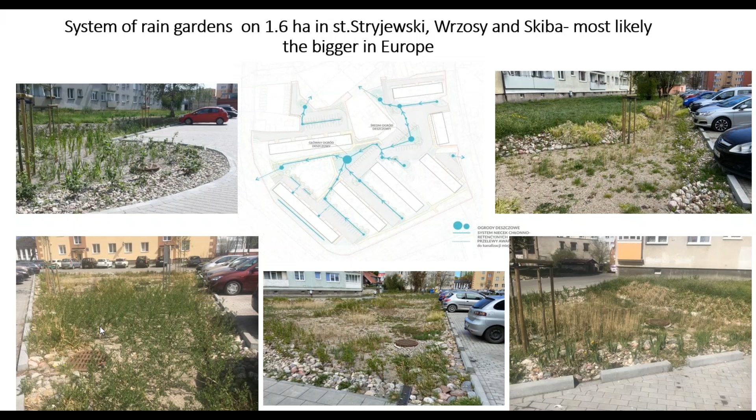This is 2 years old, and as you can see, these are pictures from last week, and it's really very dry. We expect rain tomorrow.

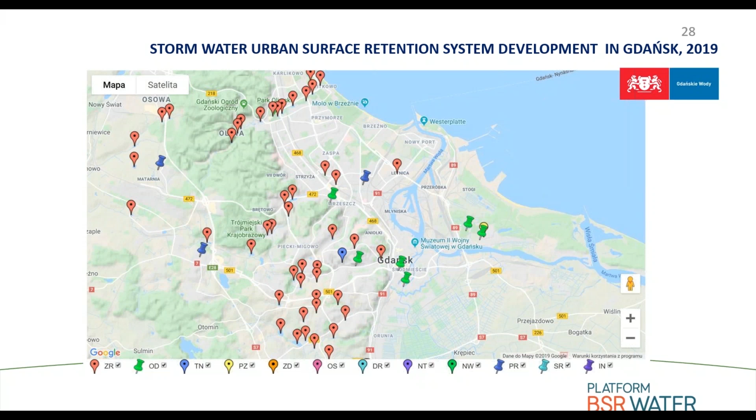So finally, there was still no possibility to see how it works, but we hope that it will work in future. Here you have examples of how this stormwater urban surface retention system is developed in the city, a lot of points, and after this year we hope that a lot of rain gardens in our city will be developed due to some extra money dedicated by the city.

We still have an issue with street and road design, because during and after storm events there is a problem with communication. It's because our green areas are usually higher than the road, and the problem is that the green areas are dry and drain, while the water goes through the streets.

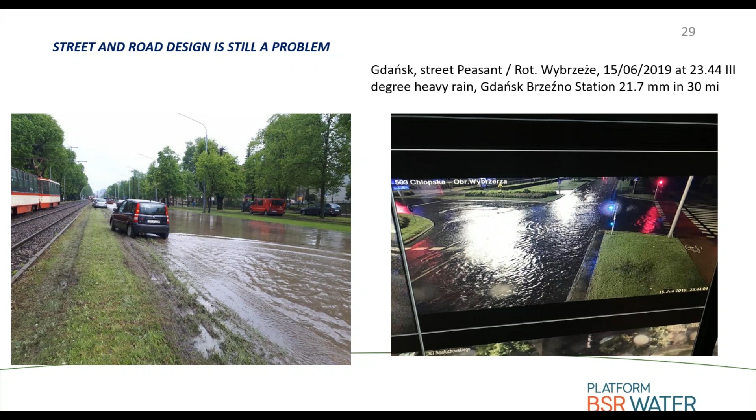In my point of view and the point of view of the city, it should be changed. It means the green areas should be the recipient of stormwater. We need to change the approach on how to design streets and green areas. But up till now, it's a bit complicated.

So to come to some conclusions: retention reservoirs located on the streams have proven to be a solution as a base of flood safety in Gdańsk, but of course it's not enough due to development of the city and climate change. We need to change the approach to stormwater management, mainly in roads and streets, by maximizing the use of green infrastructure like rain gardens, green roofs, and other retention areas. Rainwater should be treated as a valuable resource and used for irrigation of green areas.

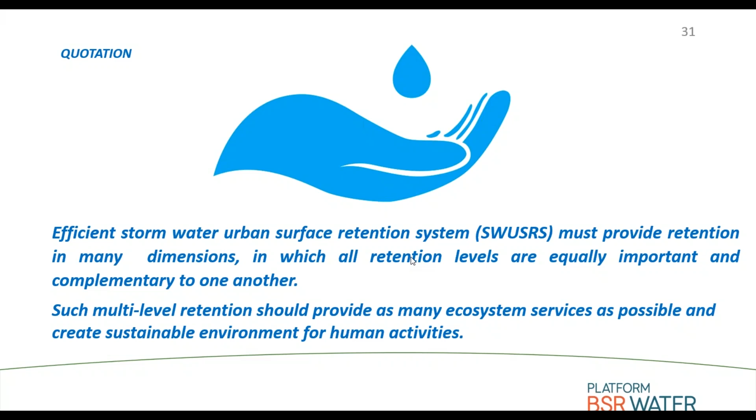And this is it, this is my quotation, which probably you already know. In our approach, it is important that all retention levels are equally important and complementary to one another, and that they need to provide as many ecosystem services as possible.